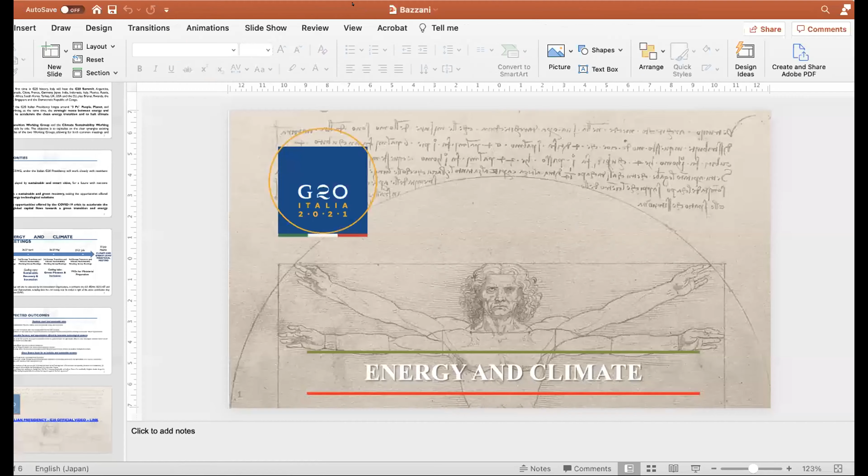As you can see in front of you, in my virtual background, the symbol of the Italian presidency this year is the Vitruvian Man, the famous drawing from Leonardo, representing man and its perfection within the space, within the planet we are living in. What better example of the nexus between energy and climate, for a more prosperous, livable reality, than this?

We intend to make, for the very first time, energy and climate a driver for development, a driver for sustainability, accelerating the clean energy transition and halting climate change. Next slide, please.

This is the decision why this year we have decided to have the energy transition and climate sustainability work hand in hand together towards the first ever joint energy and climate ministerial meeting. We have decided to elevate to the podium of the ministerial meeting the climate change issue together with energy, because energy is, as of today, responsible for around two-thirds of global GHG emissions.

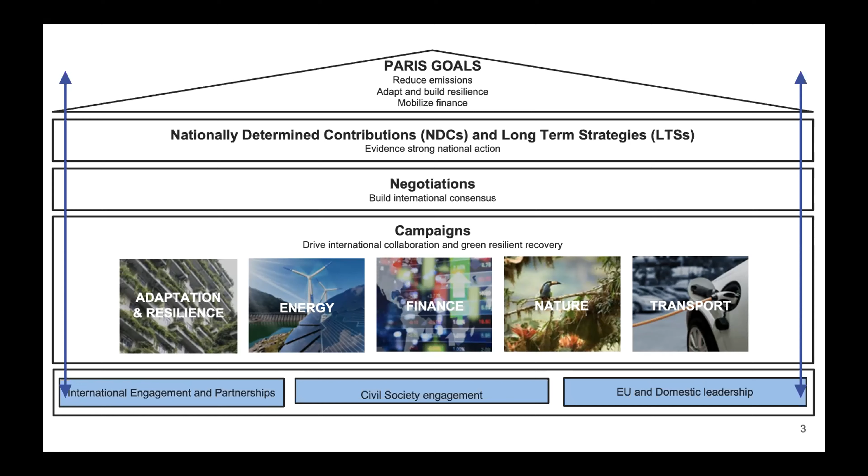Under the partnership agreement for the COP26 presidency, Italy will host a series of preparatory events. In particular, we will host in Milan the pre-COP, the preparatory meeting for ministers, traditionally held about a month before the COP, aimed at offering ministers representing the main negotiating parties an opportunity to informally discuss key political aspects of the upcoming conference. It's a relevant step for the negotiations to succeed.

We will also host in Milan, back to back, an event called Youth for Climate Driving Ambition, linked to the pre-COP, giving young people from all over the world the opportunity to draw up concrete proposals which will then be taken into account by the pre-COP and COP26.

We decided to join the two events because we believe it is crucial to promote the engagement of young generations and channel in a positive and constructive way the youth mobilizations we see all around.

We will also host in Rome in October a high-level ministerial outreach event on environmental and climate challenges in Africa. Our vision is that all these events should be an opportunity to broaden the theme of ambition to all actors involved in global climate action, including young people, civil society, the business world, academia, local authorities, and regional institutions. Thank you.

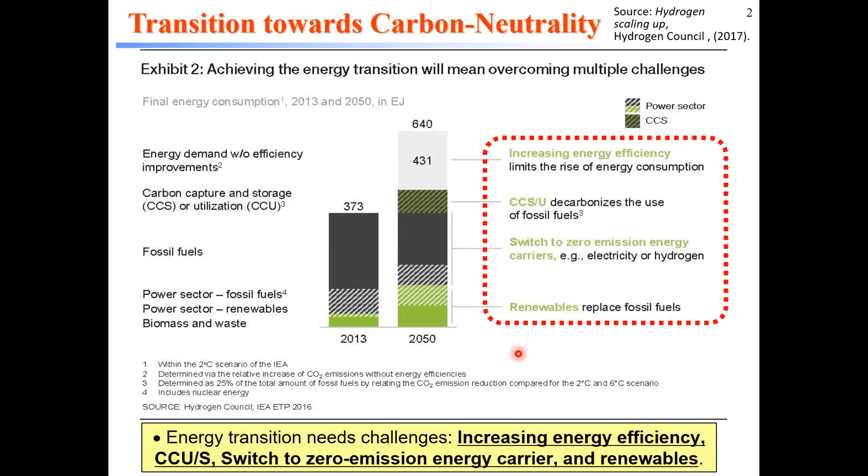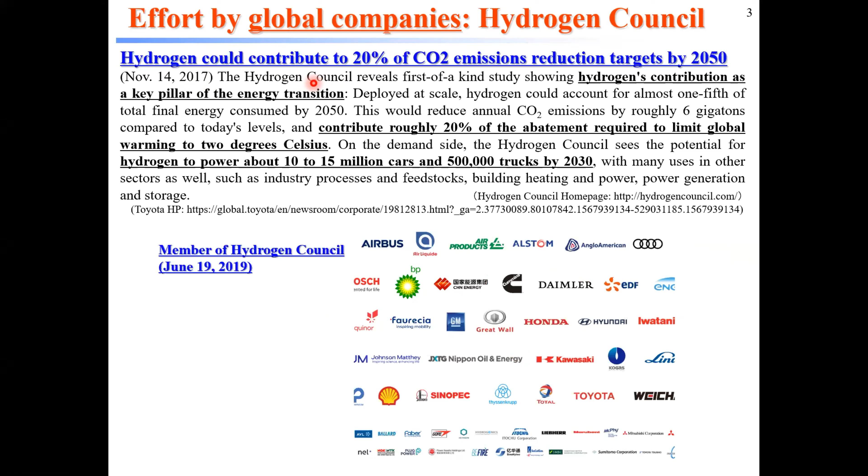Especially almost 5 years ago, many of you were excited about new fuel cell vehicles. For example, in Japan, Toyota released commercialized fuel cell vehicles by 2014. At that time, many of us had the feeling that hydrogen was something only for fuel cell vehicles, but I think since a few years the reason why hydrogen is important has gradually changed.

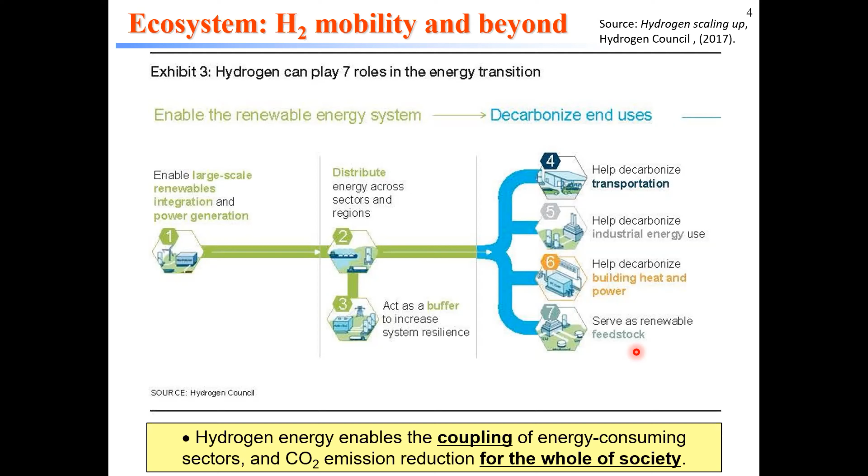Hydrogen can also act as a buffer against fluctuating renewable electricity. So such green hydrogen can be used for transportation, but also industry energy applications, building heat and power, and hydrogen can also be used as feedstock. These are the reasons why countries like those in Europe have an increasing interest in hydrogen energy technologies.

I would also like to mention the history of how the Japanese government has changed its energy policy regarding hydrogen. I think Japan was the first, or one of the first countries, to clearly establish a roadmap for hydrogen and fuel cell technologies.

This roadmap was issued in 2014, almost 7 years ago. I was also involved in the committee meeting to establish this roadmap. At that time, we had already developed a residential fuel cell. Toshiba's Matsuda-san also strongly contributed to the development of these technologies, and will give a presentation later in this webinar. We are very happy that the fuel cell vehicle was commercialized in 2015, and now we can buy commercial and industrial fuel cells for industrial applications.

Hydrogen price is still somehow expensive, but we have set a clear target to reduce it. From this fiscal year, a big national project has started to reduce the cost of fuel cell vehicles. Companies like Toyota and Honda are working hard, and we have nice collaboration with such automotive companies. In the middle of the 2020s, maybe 2025, we hope hydrogen price will be reduced down to, for example, 30 yen. Currently, 100 yen is the price. But if hydrogen prices go down to 30 yen, we can also expand the applicability of hydrogen technologies.

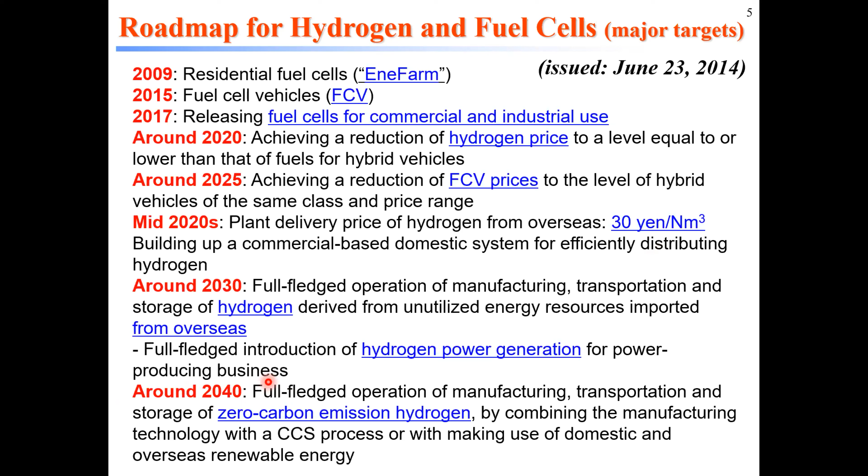Around 2030, hydrogen may also be imported from overseas, because Japan is a relatively small country, so we must import a huge amount of energy resources from overseas. We hope we can import green hydrogen rather than blue hydrogen. We are also developing technologies, for example ships for hydrogen transportation. By 2040, we want to introduce more green hydrogen, and that is also a great challenge for our country.

After 3 years, we have revised the scenario for the basic hydrogen strategy. This is a public national paper, and you can clearly see the numbers for such targets. It's important for private companies because when the government has a clear target, private companies can consider their strategy and make long-term investments to develop such technologies. For example, hydrogen volume is stated, and the cost of hydrogen is stated. Currently $10 per kilogram, but in the future $3 per kilogram, and eventually we will reduce the hydrogen price down to $2 per kilogram, with which we can realize or start power generation using hydrogen or hydrogen carriers like ammonia.

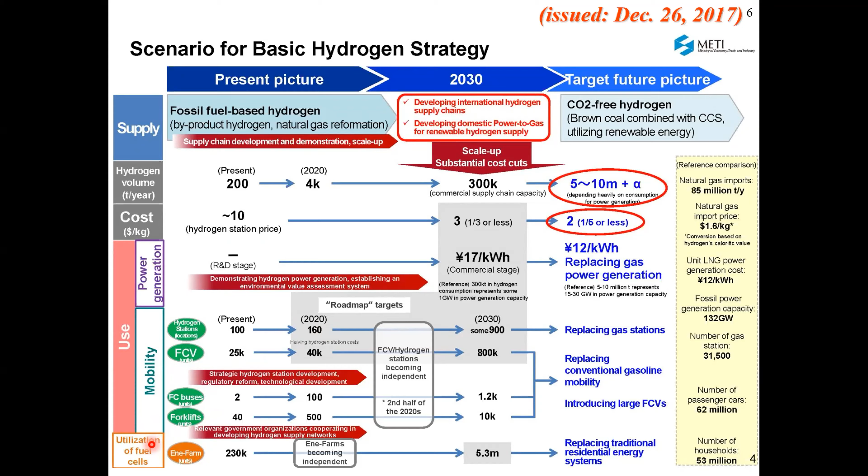Mobility is one of the important applications, and we can now buy fuel cell vehicles. Many countries have realized that FCV is a promising technology, not only for private vehicles but also commercial vehicles like buses, trucks and trains. We are moving in this direction, and several companies have started to develop such commercial vehicles. Especially in Japan, we need electricity and heat at houses, so residential fuel cells, like the Ene-Farm, have become a popular product. Solid oxide fuel cells and polymer electrolyte fuel cells can also contribute to these technologies.

It is clearly stated that we should reduce CO2 emissions from electricity and power generation, and reduce CO2 emissions related to fuels and feedstock. It is clearly stated that by 2050, electricity must be produced in a decarbonized manner. Maybe 50 to 60% should be renewables, and 30 to 40% should come from either nuclear or fossil fuels, but combined with CCUS - carbon capture, utilization or storage.

It is very nice for me because that was our first official government paper which clearly stated that hydrogen or hydrogen carriers like ammonia should produce 10% of the whole electricity in our country. That is the first such paper, and it is very surprising. But it is a very tough target because we should produce hydrogen in a much cheaper way, and mass production is important.

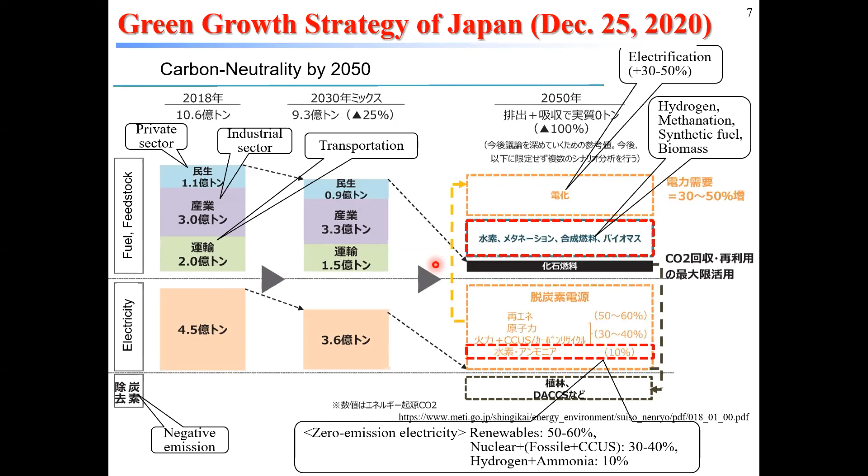That is official paper, and I think government officers will also use the English version in official meetings. For example, G20 is hosted by your country, and it is very nice for such continuous discussion.

So hydrogen is something important, becoming increasingly important, because until now we have electricity and heat widely used as a secondary energy carrier. But now we can introduce hydrogen as the third secondary energy carrier, but also a chemical hydrogen energy carrier. And that becomes possible because industry, in Japan and also around the world, has developed fuel cells and electrolyzers. And of course we have started to introduce hydrogen infrastructure like hydrogen refilling stations.

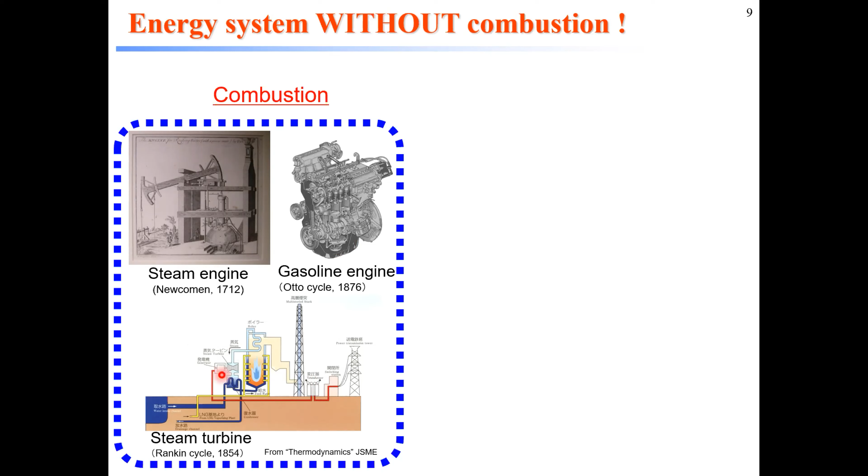So hydrogen is not something theoretical anymore, and we hope that Japan can also continuously contribute to that type of technologies. Hydrogen can also be used for combustion technologies, because now we are discussing, for example, mixing hydrogen gas with natural gas-based power plants, or ammonia may also be introduced in coal-based power plants. So such power plants may continue to be used, but gradually we can also realize the decarbonization of such power plants.

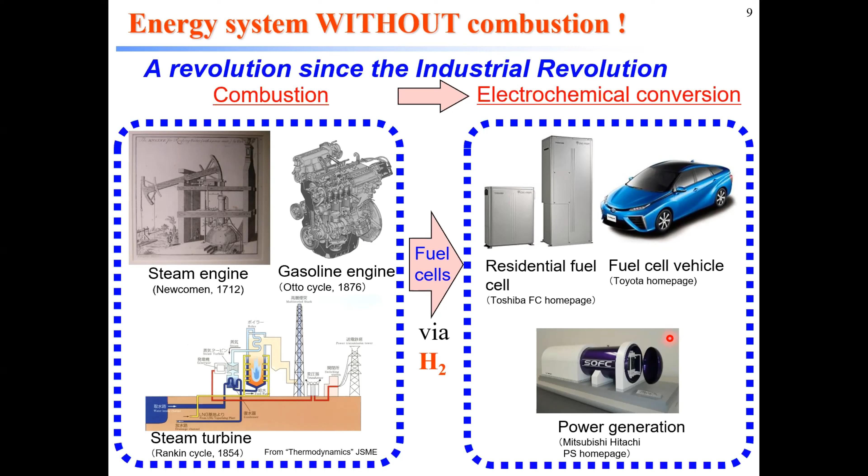But of course, as an electrochemist, and Enrico is also an electrochemist, we are very happy that fuel cell technologies will also continuously advance. Now in Japan we can also buy the residential fuel cell, we can buy fuel cell vehicles, and larger scale fuel cells become increasingly important. I think Solid Power is very active in Italy in this area, and I'm very happy to hear their presentation.

And of course transportation is one of the important applications of hydrogen. For example, Toyota has already announced the second generation Mirai, and actually Kyushu University had already ordered this Mirai by December. So if you come to Kyushu University, you can also enjoy driving the new Mirai, but also the first generation Mirai, and Honda Clarity. But after the COVID-19 pandemic, hopefully we can also meet that at our Ito campus.

In addition, I should also mention that an increasing number of companies have interest in realizing commercial vehicles with fuel cell technologies, and that is a very challenging area where, for example, countries like China, the United States, and also European countries have strong interest in such commercial vehicle development.

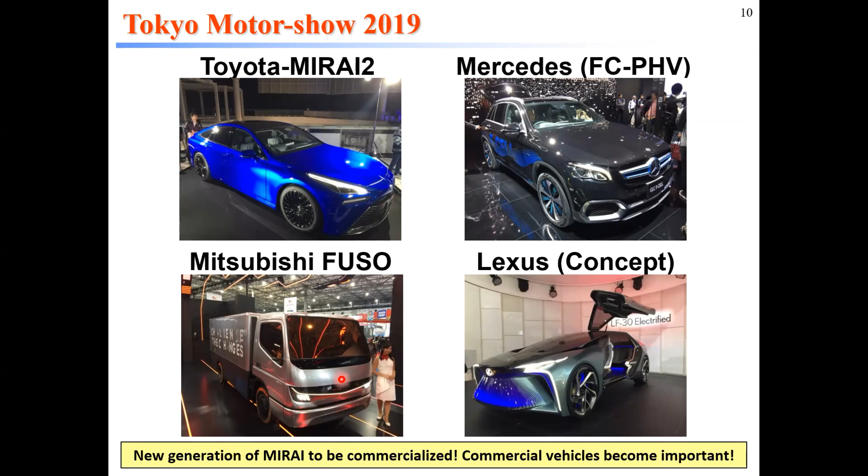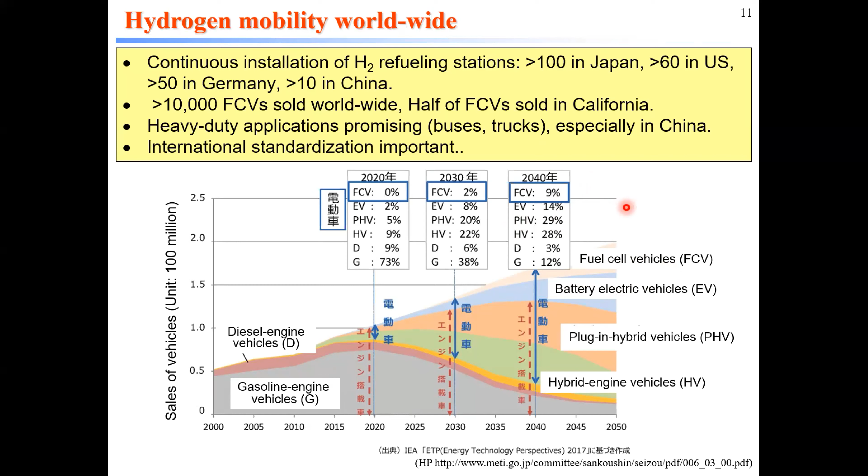Even though fuel cell vehicles need time, because we are also developing, for example, mass production technologies, it takes time, but with time we can also increase the fraction of fuel cell vehicles. For example, IEA expected that by 2040, FCV may be 9%. 9% is very small, but developing the mass production technologies is also a very, very tough, great challenge for fuel cell engineers and researchers.

I hope both types of fuel cells, polymer electrolyte fuel cell and solid oxide fuel cell, can also realize wide application of such electrochemical energy systems. For example, polymer electrolyte fuel cell is very nice for automobile application, but a company like Airbus has already announced an airplane using hydrogen. This is very interesting topic.

And also solid oxide fuel cell is a promising technology. We are saying that it's a hydrogen-ready technology, so hydrogen can also be used for the solid oxide fuel cell, but other fuels, for example renewable methane and biogas and so on, can also be used by solid oxide fuel cell. So SOFC is also included as hydrogen-ready technology, and using both types of fuel cell, we can also contribute to decarbonizing the technologies.

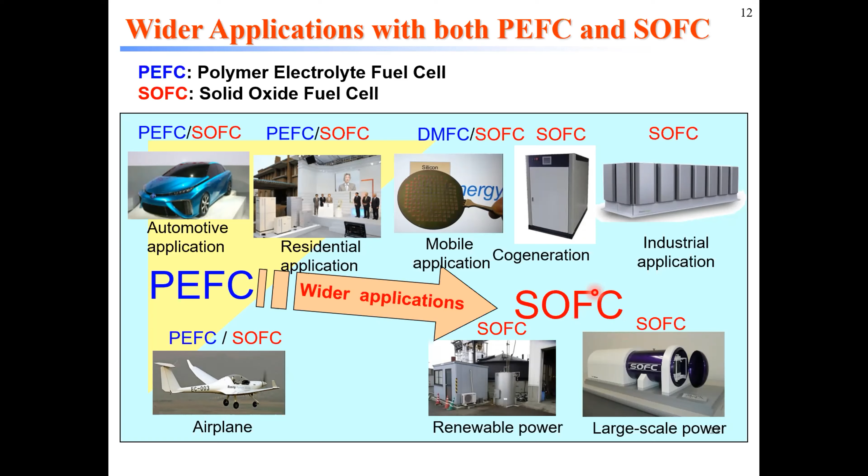We can buy the solid oxide fuel cell in our country for more than 10 years now. For example, current residential fuel cells can also generate with energy conversion efficiency beyond 50%, and the company guarantees no maintenance during 10 years. The reason is that we have understood the durability of the solid oxide fuel cell. Now the product is in the market.

Yeah, it is also very challenging to work in this area because larger scale application of fuel cell is interesting. For example, that is one of the first systems installed in our campus. I'm also standing here.

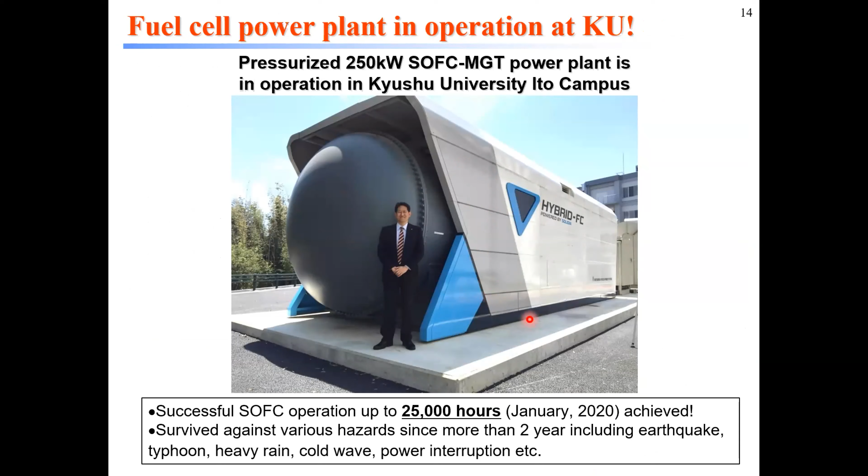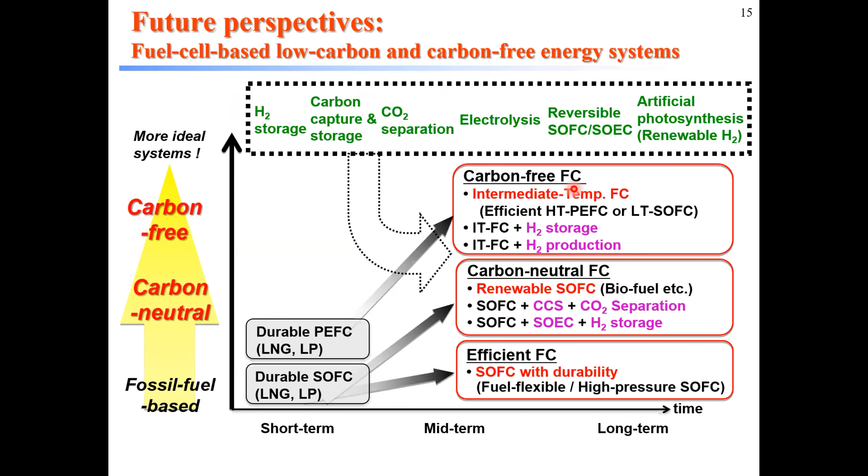I was always very happy, and we are also continuing such commercialization in our countries. I hope that other various technologies should be developed to combine with fuel cell technology to realize more efficient energy systems, a carbon neutral and carbon free energy system, which we will also develop in the future.

If you want to understand why Japan has such strong interest in fuel cell and hydrogen technologies, please read our book published five years ago. You can find there the Japanese secret of why we have such strong interest in these kinds of technologies.

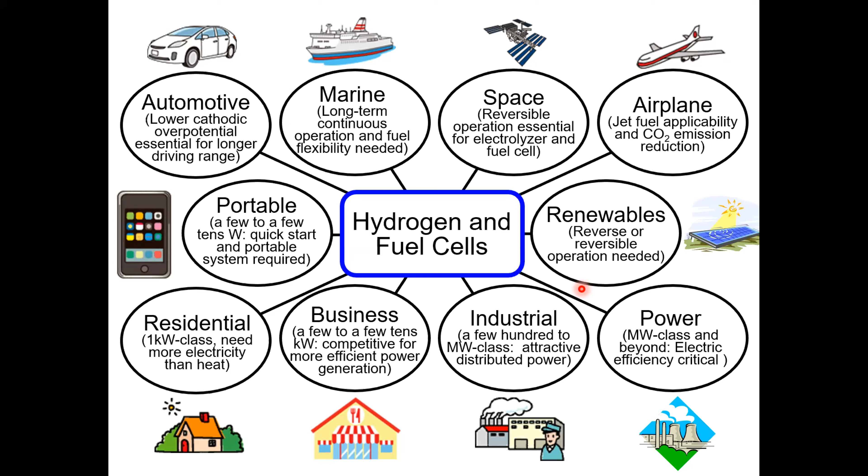Even though the application is still limited to automotive and residential uses, we are expanding the applicability of fuel cell technologies. For example, this fiscal year the government started a new project for fuel cells for marine application, and the government has also placed great importance on hydrogen for airplane application. I hope this ecosystem of hydrogen fuel cells will expand, where both countries can make certain collaborations.

So even though we are still using so-called gray hydrogen, because most hydrogen is still produced from fossil fuels, we are also developing fuel cell and hydrogen infrastructures. We hope to simultaneously make the transition from gray hydrogen to blue and especially green hydrogen, which may be the ultimate solution in the future. And that must be realized by 2050.

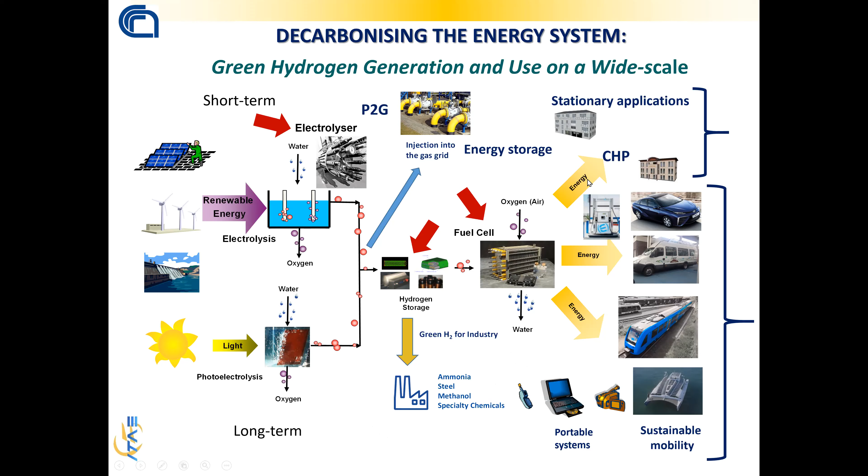Today, I will discuss more in detail some technical aspects of electrolysis technologies. We have a consolidated alkaline electrolysis technology, but in recent years polymer electrolyte membrane electrolyzers have become very important in this field because of their excellent dynamic behavior, which allows systems to operate in combination with intermittent renewable power sources. Using these systems, we can achieve extremely high current density, extremely high performance, high hydrogen purity, and operation at high pressure, because we need pressurized hydrogen to achieve high energy density.

However, there are significant drawbacks still to overcome in order to make the system economically competitive and to widely address the conversion of electricity into hydrogen.

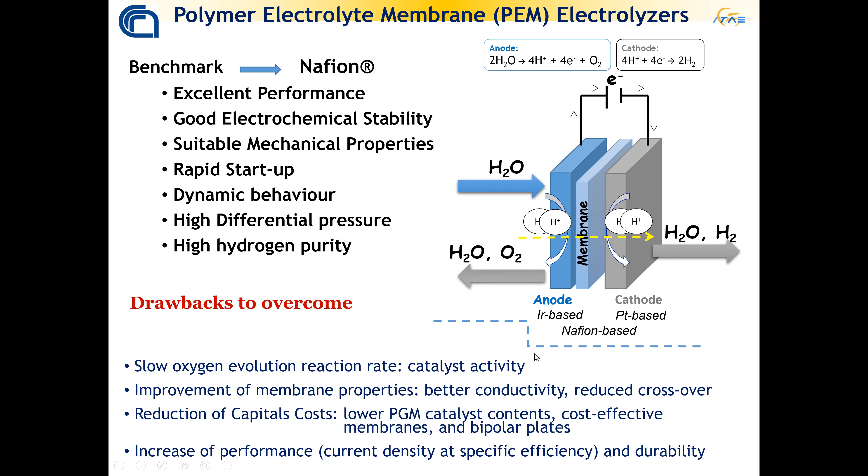We need to accelerate the oxygen evolution reaction by using enhanced electrocatalysts. We need to operate at a high current density to reduce capital costs, and we need to reduce the critical raw materials and improve membrane properties.

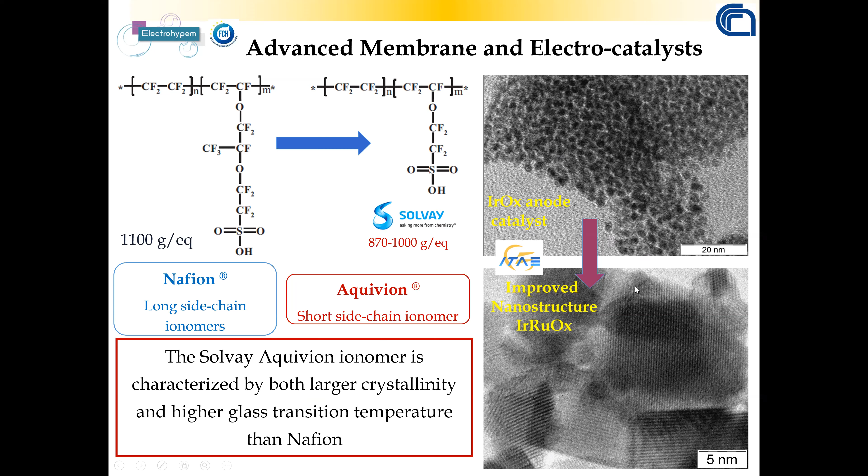In the FCHJU Electrohypem project, a European project I had the honor to coordinate, we introduced for the first time the Italian-produced Aquivion membrane produced by Solvay Specialty Polymers into the field of PEM electrolysis. This membrane has enhanced properties in terms of lower equivalent weight, wider operating range, and higher conductivity. We also introduced improved nanostructured electrocatalysts in place of conventional electrocatalysts to increase the performance of PEM electrolyzers.

The enhanced efficiency of this new membrane produced in Italy was assessed by our colleagues at ITM Power in the UK, in the framework of this European project, and reinforced membranes can allow operation at high differential pressure in the context of electrolysis.

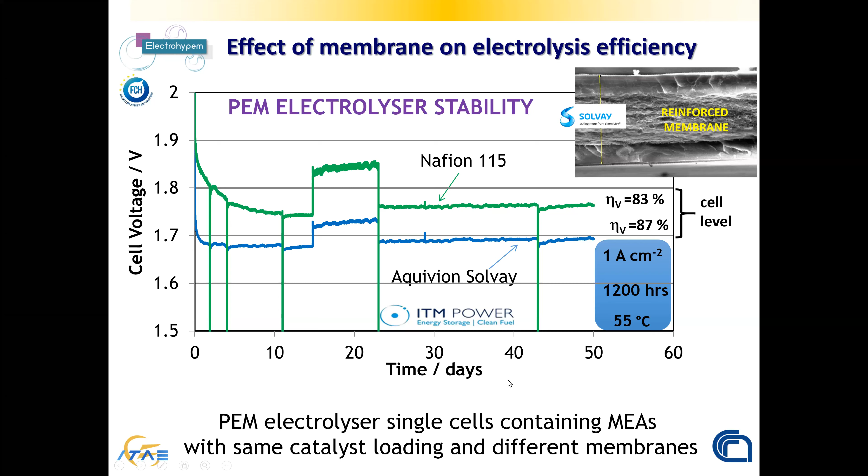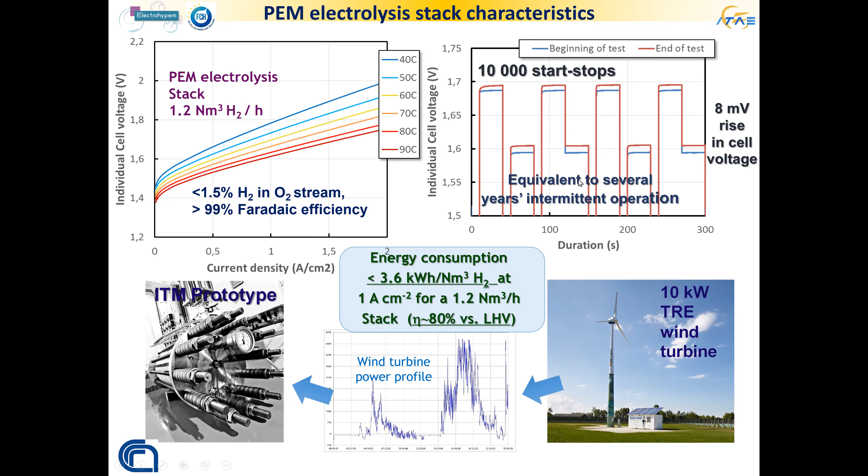In the framework of this European project, we have assessed interfacing a PEM electrolyzer with the intermittent power profile from renewable wind turbines produced by Tozzi Renewable Energy, and we have shown that this advanced technology can operate with excellent dynamic behavior, sustaining something like 10,000 starts and stops without relevant degradation and with excellent Faraday efficiency.

In the subsequent European project, HPEM2GAS, also coordinated by myself, we addressed the ambition to increase the operating current density from 1 to 3 amperes per square centimeter, while maintaining cutting-edge efficiency of 80%, with energy consumption lower than 50 kilowatt-hours per kilogram of hydrogen.

We introduced this new advanced electrocatalyst and membranes into MEAs produced by IRD in Denmark, and these were integrated into PEM electrolysis stacks produced by ITM Power.

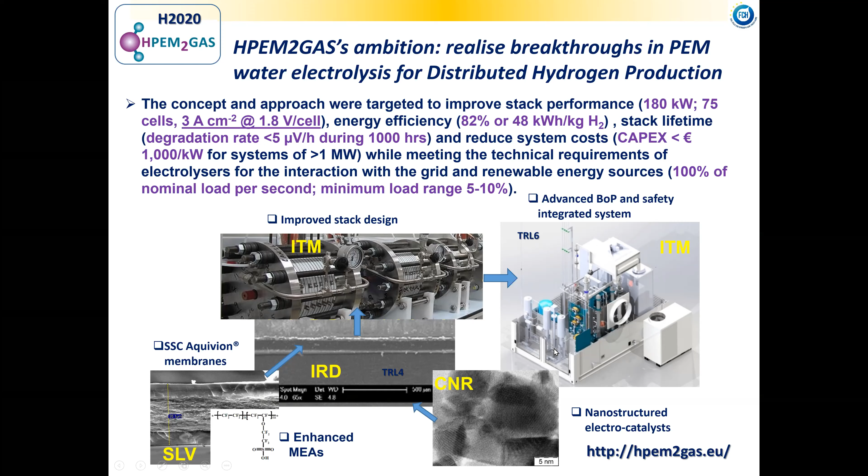We have demonstrated that this advanced stack technology, a 180 kilowatt stack, is based on an advanced design. You can clearly see in this case there are no tie rods - this is using a new hydraulic compression technology.

Using this approach in the framework of the HPEM2GAS project, we achieved 80% efficiency at 3 amperes per square centimeter. This stack has been integrated into an electrolysis system, and this was demonstrated in Emden, Germany.

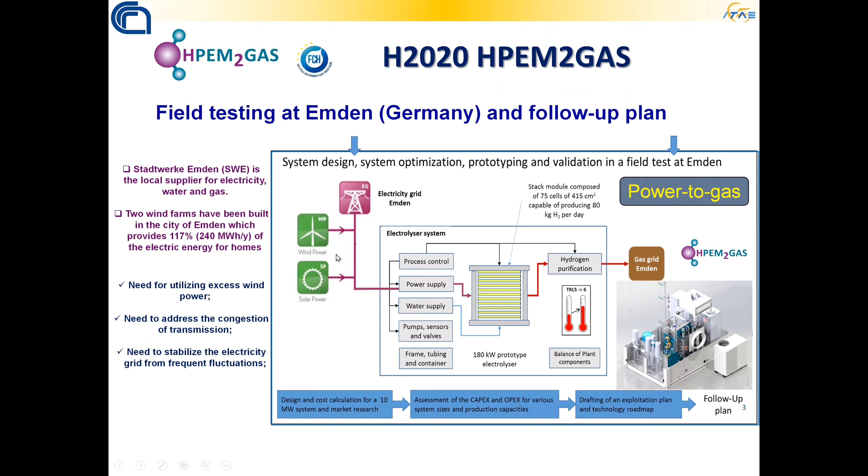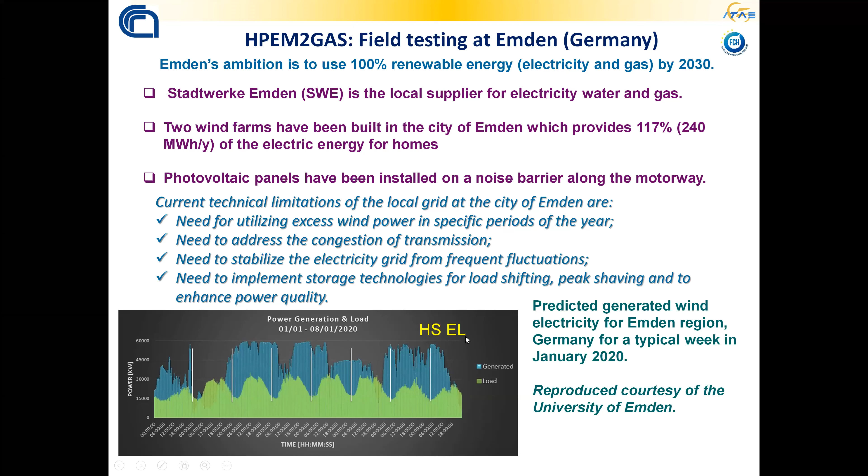This means that in order to avoid this surplus of energy being lost because it cannot be accepted by the grid, it should be converted into chemical energy. We installed, as a proof of concept in Emden, in the framework of this EU project, an advanced PEM electrolysis system, 180 kilowatt, connected to a gas uptake station in order to inject the hydrogen directly into the natural gas grid.

In this field testing activity using this advanced PEM electrolysis stack technology, we showed excellent performance in terms of low energy consumption per kilogram of hydrogen produced, about 50 kilowatt-hours per kilogram of hydrogen, especially at high current density.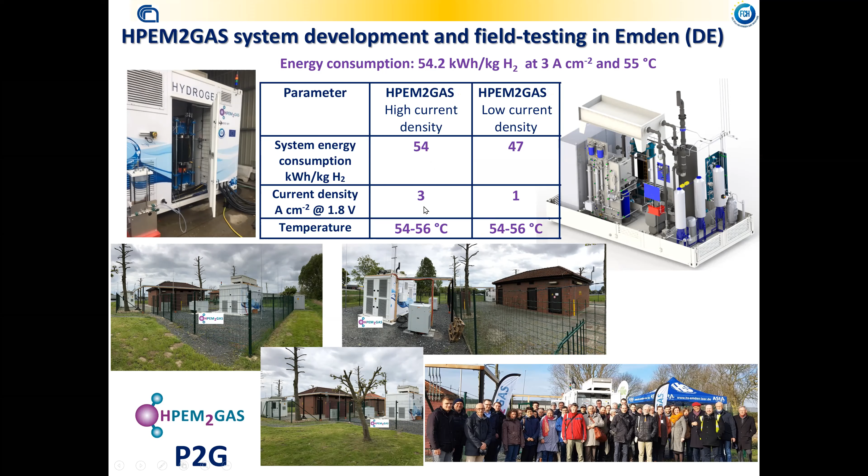Now, the new frontier in this field is regarding anion exchange membrane electrolyzers. This is still a PEM electrolysis technology using a membrane separator operating at high pressure in order to reduce energy consumption in the post-compression process.

But this new membrane is based on an anion exchange process. That means the protonic membrane is replaced with an alkaline membrane, and we can replace all precious metals with non-precious, non-critical raw materials, and replace titanium bipolar plates with cheap stainless steel. Using this technology, we think we can reduce the capex of electrolysis technology from more than 1,000 euros per kilowatt to about 500 euros per kilowatt.

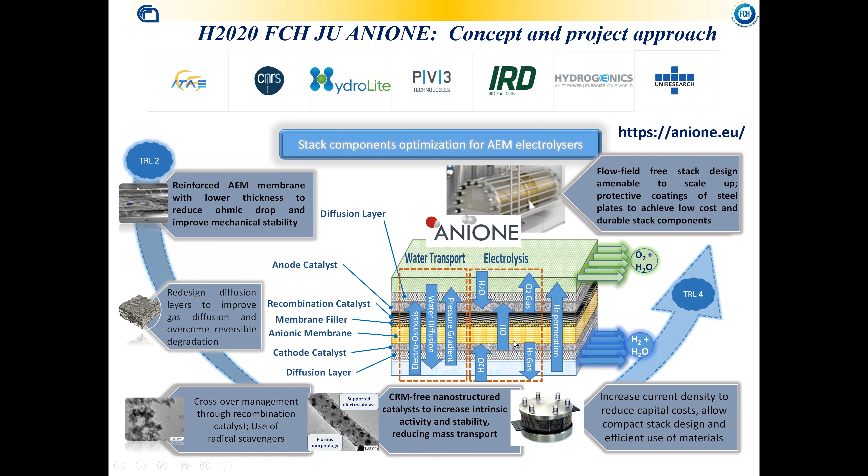Now I will briefly discuss end uses of green hydrogen. Our institute is strongly involved in developing PEM fuel cell stacks for automotive and stationary generation using green hydrogen. This is the evolution of PEM fuel cell stacks in our institute, based on advanced platinum alloy electrocatalysts and new membranes.

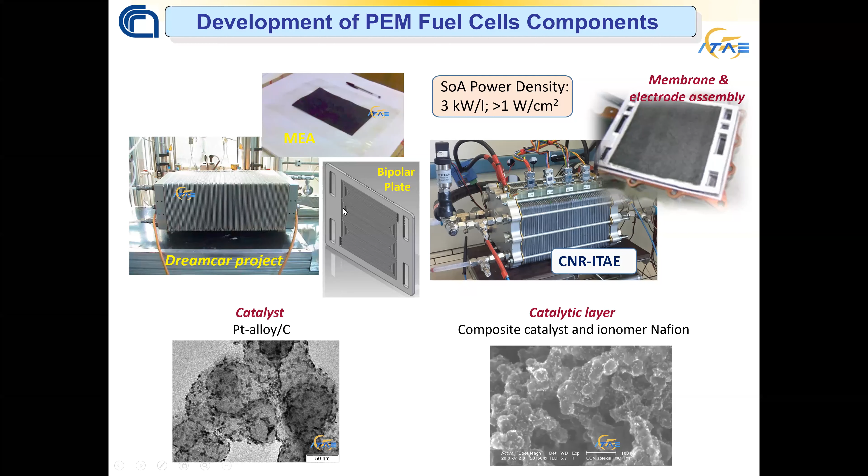Our collaboration with Solvay has shown the capability to operate these PEM fuel cell stacks at high temperature, covering a wide range of temperature. We have filed a patent together with Solvay on using radical scavengers in order to improve membrane stability over time.

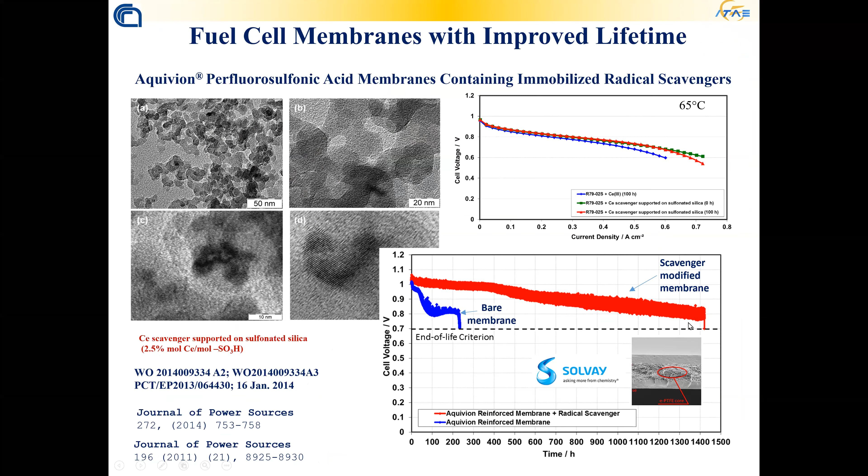Just a few slides about demonstration projects carried out by our institute. I'm referring especially to some regional projects.

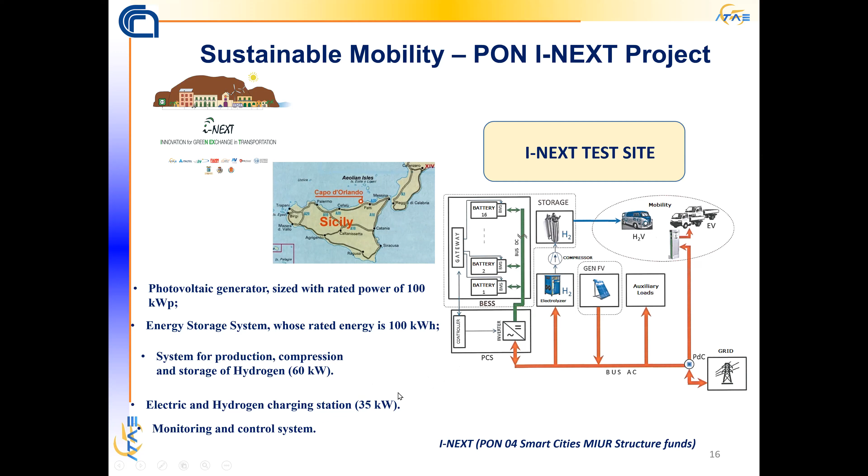The I-NEXT project we developed in a small municipality in Sicily, in Capo d'Orlando, a hydrogen valley based on a photovoltaic plant, electrolyzer, and refueling station. We produced green hydrogen to refuel small city buses currently used for recreation activities, and especially focused on the hybridization concept, hybridizing fuel cell systems with battery systems.

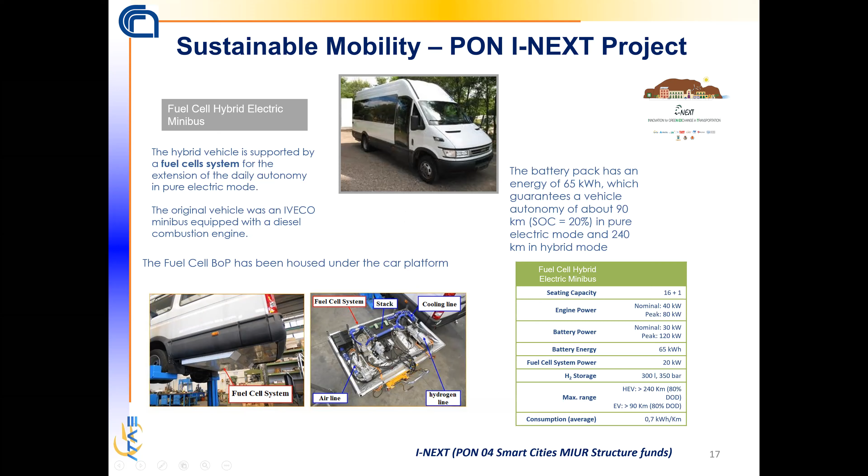Inside the balance of plant of this automotive system, these city buses have been developed in the framework of these regional projects, as examples of urban and suburban bus testing. Our activity at CNR ITAE Institute also covers the naval sector.

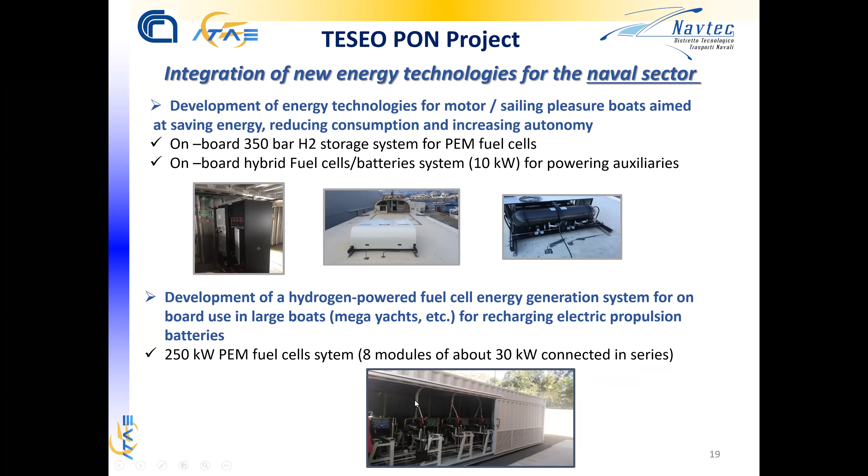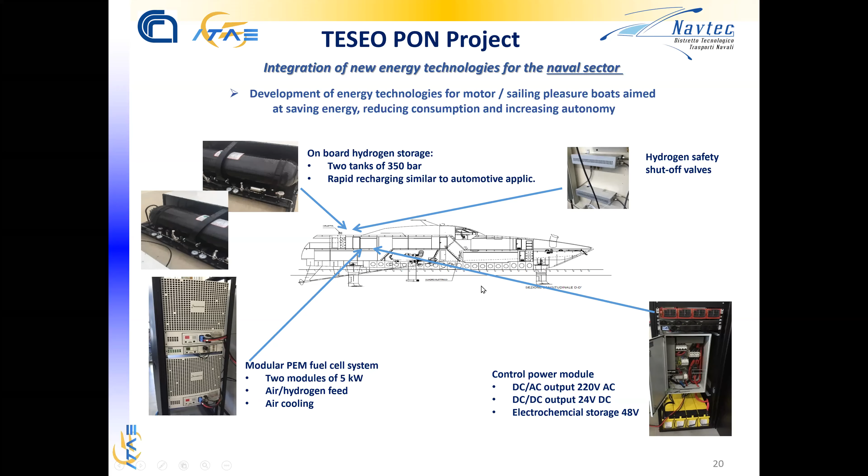We worked in the framework of the TESEO project on integrating hydrogen technologies on board small yachts and boats. We tested the hydrogen container on board and the fuel cell system. This slide shows how these technologies can be integrated: the hydrogen container, the fuel cell system, and the battery system into small yachts for naval applications.

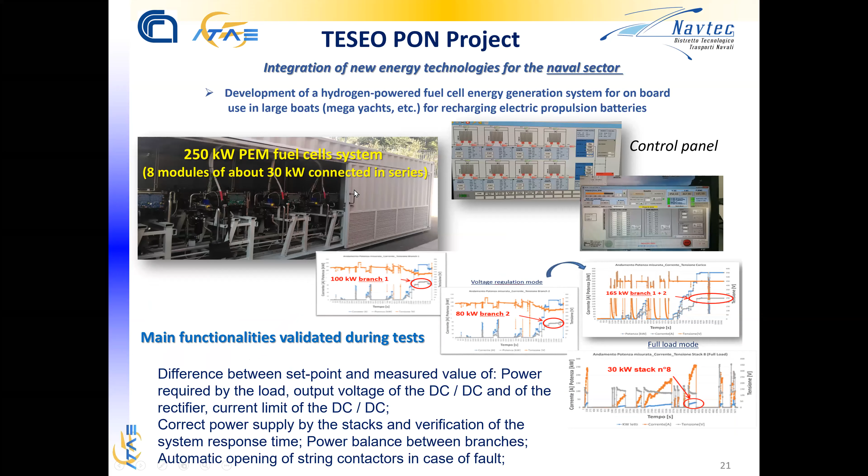This is a 250 kilowatt PEM fuel cell system to be used in naval applications. Very recently, we started a cooperation with Fincantieri to assess hydrogen technologies on board of boats used as a hydrogen laboratory, to test these advanced technologies.

This boat, called Zeus, tested in the framework of the TecBia project funded by the Italian Ministry of Economic Development, consists of a fuel cell system of 120 kilowatts on board with a hydrogen tank of 50 kilograms, allowing several hours, about 6 hours of navigation under complete autonomy at zero emissions.

With this, I have concluded my presentation, trying to provide insights about the projects we have carried out in this field in the framework of hydrogen. Of course, this is a great opportunity for us to have some cooperation with Japanese institutions. We already cooperate with AIST. I have already signed a cooperation agreement with AIST to work on polymer electrolyte membranes for fuel cell applications, and we are strongly open to cooperation with Japanese institutions. Thank you very much for your kind attention.

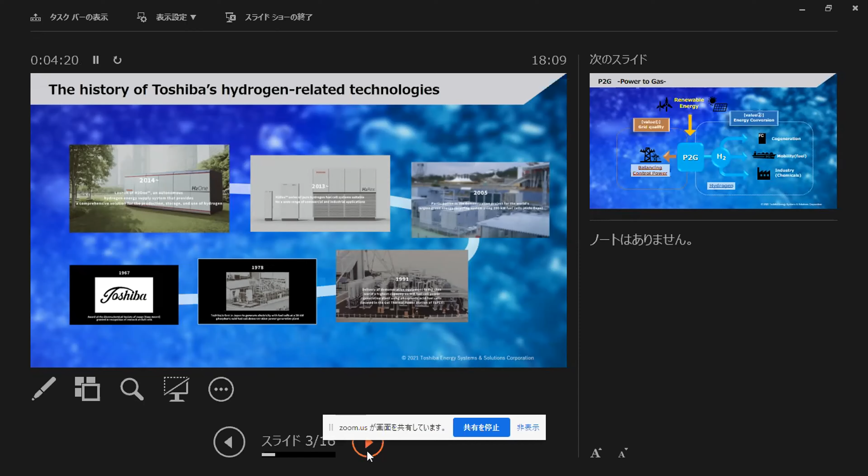This picture shows one example image of Toshiba's fuel cell business. Our most interested area is green hydrogen. Using power-to-gas technology, green hydrogen can be made.

We need to increase renewable energy. However, renewable energy is very fluctuated, not stable, so to keep good grid balance and grid quality, some adjustment system is required. Toshiba is considering green hydrogen from renewable energy and also demand response from the grid side to make hydrogen. It's a very good solution for power companies and hydrogen supply chains.

The stocked hydrogen is delivered to a variety of places, and at each site hydrogen is used to make electricity. For example, CHP cogeneration, mobility use, or large size industry uses. For stationary fuel cells, we are supplying a 100 kilowatt type package hydrogen fuel cell unit, and we are also ready to supply few megawatt class hydrogen fuel cell systems.

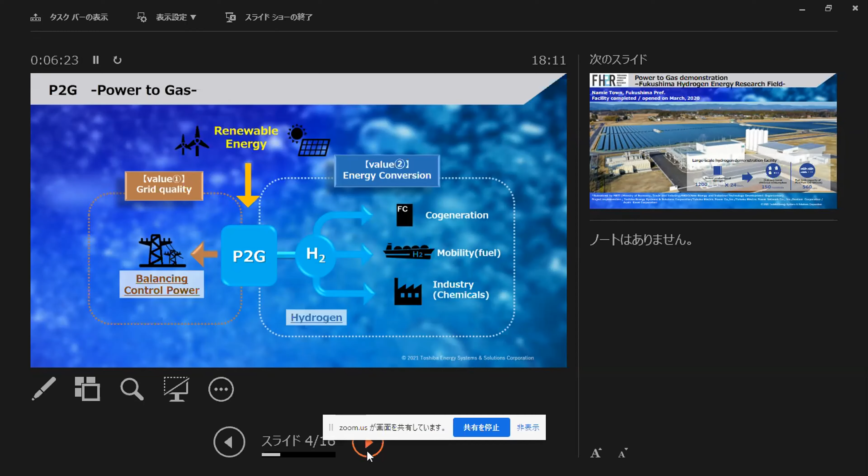Today's topic, I would like to explain, is that we started the fuel cell module for heavy duty mobility vehicles.

This is the demonstrational plant, Fukushima Hydrogen Energy Research Field. This is a large-scale demonstration facility funded by government, producing hydrogen using solar panels and also surplus energy from the grid side. This facility can produce 1,200 normal cubic meters per hour.

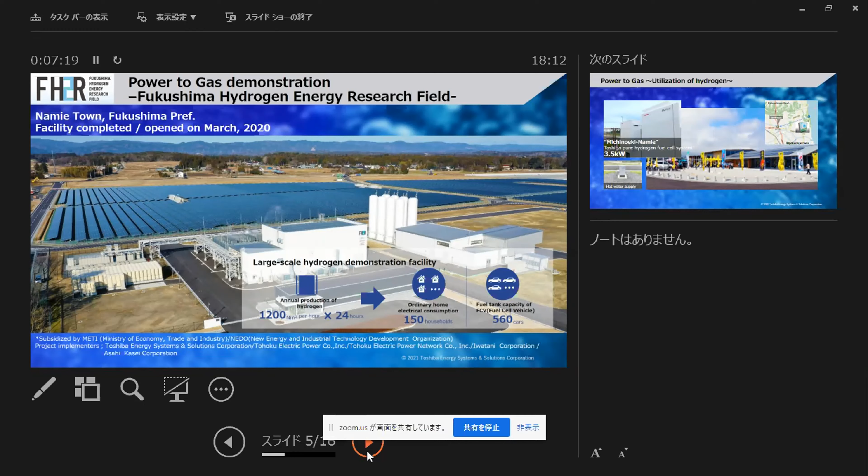This hydrogen is supplied to several areas in Fukushima Prefecture, Japan, for example soccer fields, gymnasiums, or shopping centers like this. Also, in the coming Tokyo Olympic Games, this hydrogen is transported to the Tokyo area and shall be used as fuel for fuel cell buses to transport athletes. I hope it will happen.

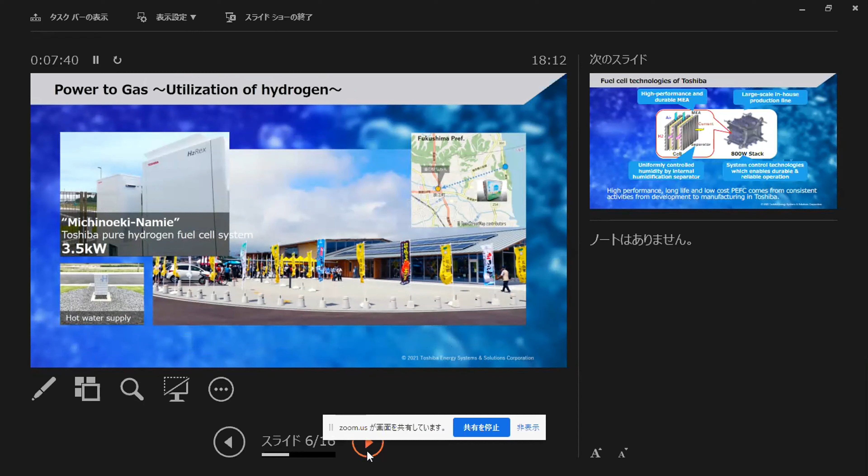This is our key technology. We are developing and making everything from material basis to power generating system. We have MEA manufacturing facility in-house and also cell stack assembling line in-house. We have a long history of system development and operation, and this enables us to achieve reliable long life systems.

This is our distinctive technology. We are using internal humidification systems for PEM fuel cells. The PEM membrane has to be wet, so anode gas or cathode air has to be humidified. For this function, we use a porous separator or bipolar plate. Each separator has a cooling water flow path, and this water can go into the porous separator plate to make a gas seal, and from the surface of the separator plate the humidification is supplied.

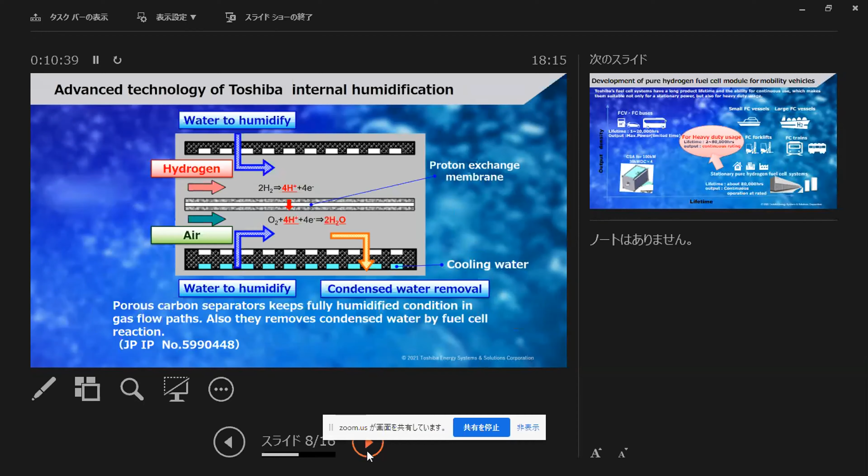This enables long life and also very low pressure drop characteristics. I have to mention the demerit of this system though - to make the porous separator, it becomes relatively thick compared to other fuel cell suppliers. It's our next developing target to make a thinner porous separator.

This picture shows the difference between fuel cells for vehicles and fuel cells for stationary uses. Stationary fuel cell systems need very long lifetime, continuous operation at rated power - at least 10 years continuous operation, meaning at least 80,000 hours continuous operation at rated power. On the other hand, for vehicle fuel cells, compact size and higher output is required, but it only requires a lifetime of maybe about 10,000 to 20,000 hours.

It's very different. Based on this, our stationary fuel cell technology - Toshiba thought for heavy-duty mobility applications, this technology may be suitable. On the other hand, the fuel cell vehicle side is trying to extend their lifetime. Anyway, good competition is very good for technology advancement, I believe.

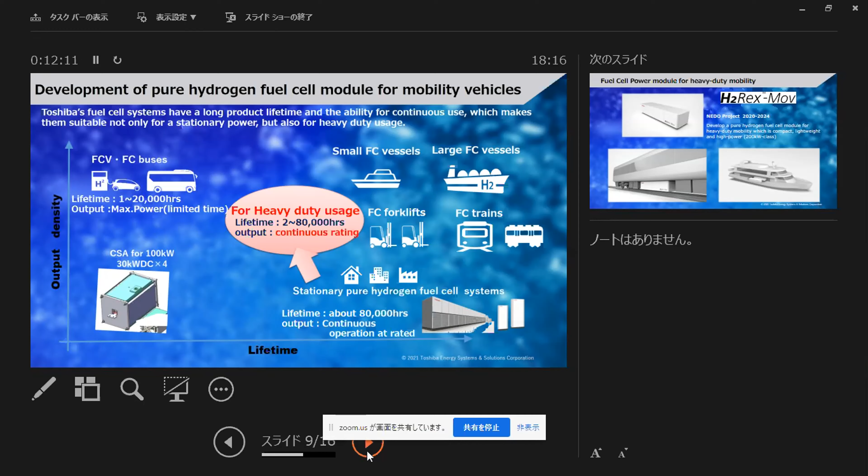So for the first product, we started development activity funded by government subsidy. We decided to develop 200 kilowatt class fuel cell modules.

for heavy duty mobility vehicles like maritime application or railway application. Why we decided 200 is, we had many people assess how much power is needed for such applications. So from the result, about 200 kilowatt per car of one train is proper. So we decided one unit shall be 200 kilowatt.

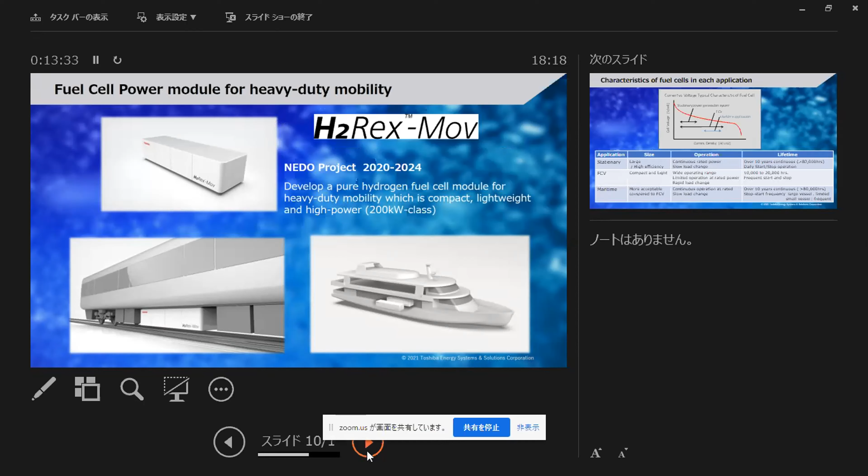However, for maritime usage, maybe a few hundred to a few megawatt is required. So we are going to design for multiple parallel operation availability. This is also the difference of operating range.

This graph shows the current density horizontal and the cell voltage vertical. Red line is general fuel cell output characteristics. The current of the fuel cell stack is linear to hydrogen consumption because of the theory of electrochemical reaction. So to have good efficiency, higher voltage is required. We are trying to improve this red line upward.

And for compact size, current density is extended to the right side. This is a development activity.

For stationary usage, we need higher efficiency because the merit is higher efficiency than grid power supply. So the operating area is relatively on the left side.

For fuel cell vehicles, maximum power, idle, or cruising power covers a very wide current density range. However, the maximum power time is somehow limited. Generally, they operate at about 30% of rated power.

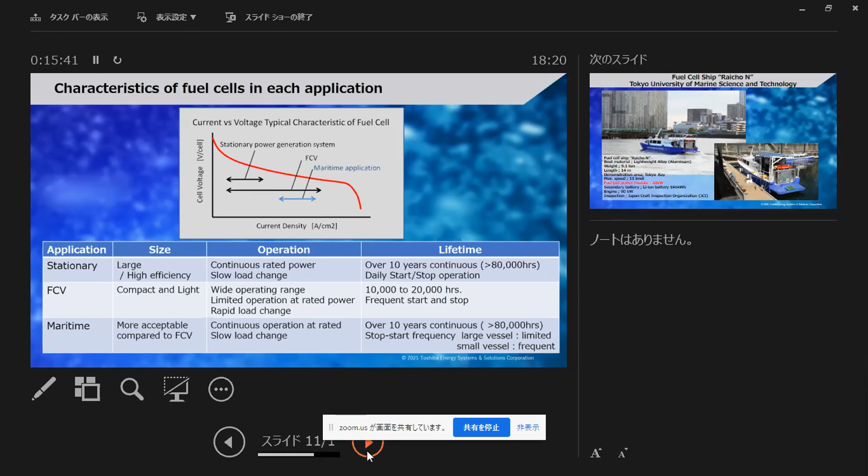For maritime usage application, continuous operation is required, and also compactness is required. However, we believe its space is larger than lightweight vehicles. This is the difference. For such application, this is our experience.

This is the 14-meter small ship operated in Tokyo Bay by Tokyo University of Marine Science and Technology.

We started cooperative development with this university from 2016. At first, we tried to install a residential unit itself, with no change to it. We installed 2 units of 3.5 kilowatt power output over 2 years. After operating for 2 years, we disassembled and checked, and found no degradation or problems. So we decided to start developing fuel cells for ships.

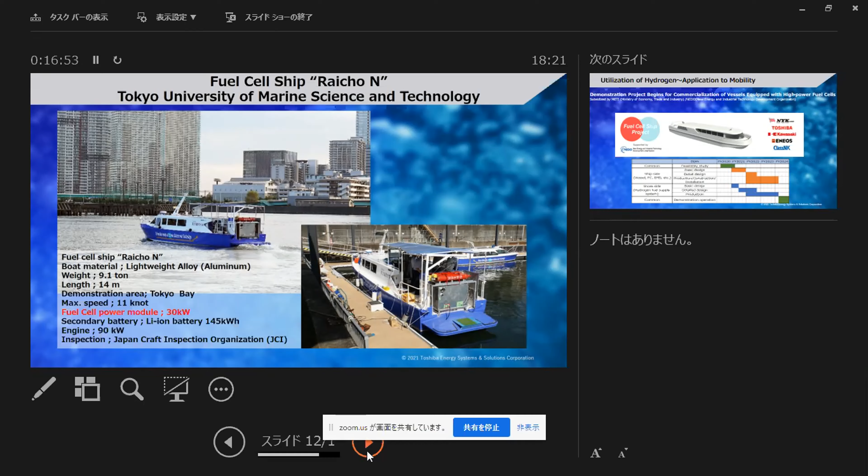Today, this ship has a 30 kilowatt unit on board and is operating in Tokyo Bay. This is a major topic of our activity.

This is also a government-funded activity. We made a consortium: the ship owner NYK Group, Toshiba as fuel cell supplier, and Kawasaki Heavy Industries, who is supplying the hydrogen storage unit on board, the hydrogen supply system, and also the energy management system. And ENEOS, the largest oil and energy supplier in Japan, is taking the lead for the hydrogen supply system on the ground side. And Class NK, the certification body, is contributing to safety testing and establishing the procedure to certify the ships. We are going to start the ship operation in 2024.

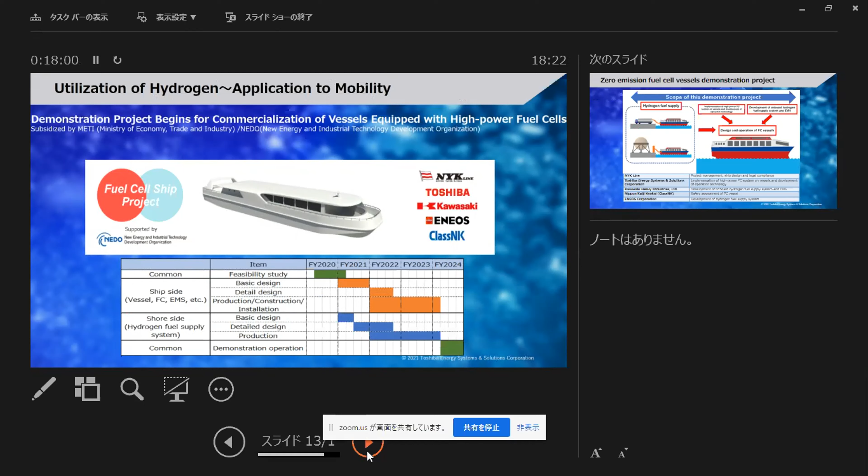And this is the demonstration program. I will show you an animation explaining this activity. Just a moment, please.

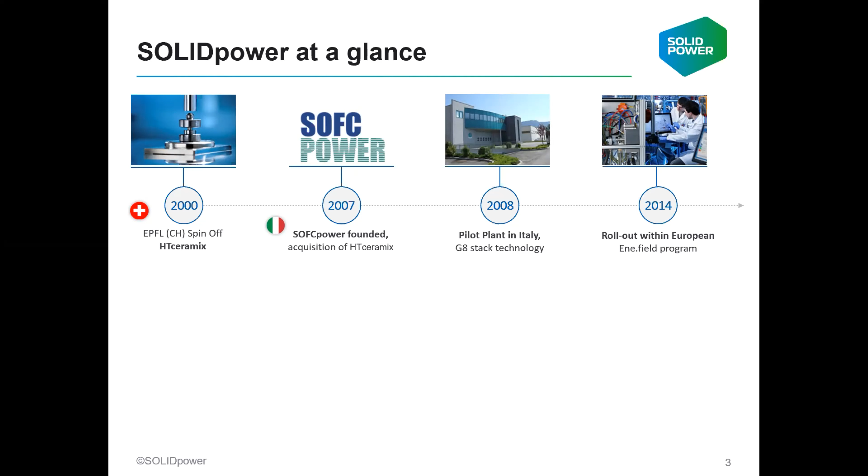In 2015, we acquired the facility of a former competitor, Ceramic Fuel Cell Germany, that was actually starting from an Australian company, a historical company in the field of solid oxide fuel cells. We restarted the commercialization of the BlueGen cogenerator in 2016.

In these years, we combined the experience of SOFC Power and the team of CFCL, the former team of CFCL, to further develop the system and start the commercialization of the current unit, which is what we call the BG15, BlueGen 15, our current product.

Last update is 2020, when we started the new industrial manufacturing plant here in Italy. I will show you some details later in the presentation.

Solid Power is distributed in 4 countries, headquartered in Italy, where we have the historical site in Mezzolombardo and the large-scale production facility in Pergine, in the Trentino area. We have a manufacturing plant in Germany, a prototyping and R&D facility in Switzerland, and another R&D facility in Australia, in Melbourne.

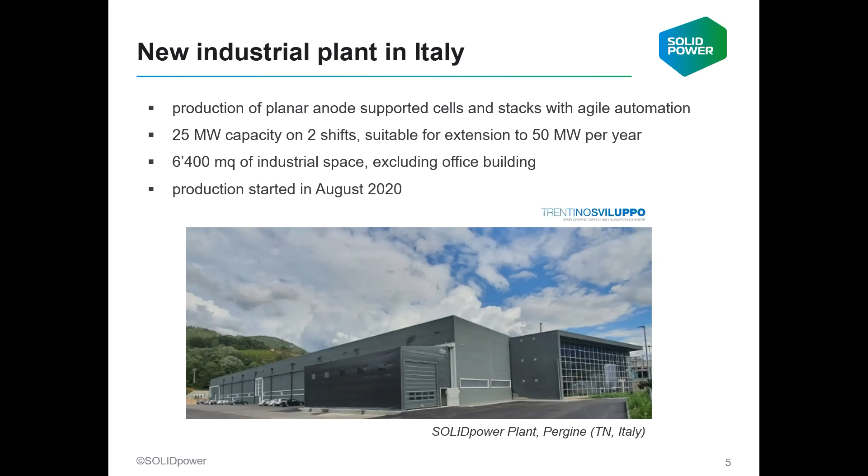This is a fully automated plant, with a productivity today of more than 1 million pieces per year. This is 6,400 square meters of industrial space, excluding the office buildings. We started production last year, in 2020, in August, so it is fully operating now.

In this plant, we produce what we call the G8 stack, which is the core of our system. This is the product ready for the market, installed on the BG15. It is a 1.7 kilowatt DC in fuel cell mode, consisting of 70 repeating elements with an active area of 80 square centimeters. The technology is based on solid oxide, anode-supported solid oxide fuel cells made with conventional materials: nickel oxide, zirconia cermet, and perovskite-based oxygen electrodes.

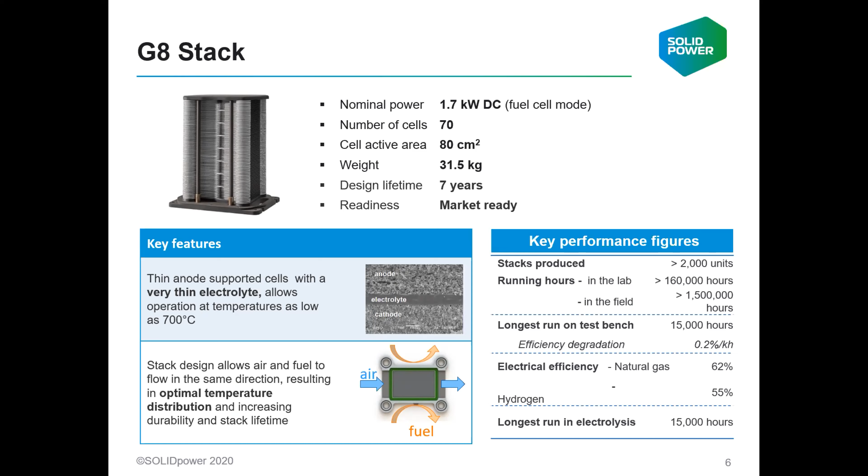On the prototyping level, we are working on a large-scale stack, mainly for industrial application. This is an 8 kilowatt DC stack and consists of an interconnect containing 4 cells. This scale-up approach helps us use the existing automated manufacturing facilities, and to use the same cells, sealing, and contact solution for both kinds of stacks, the small one and the big one.

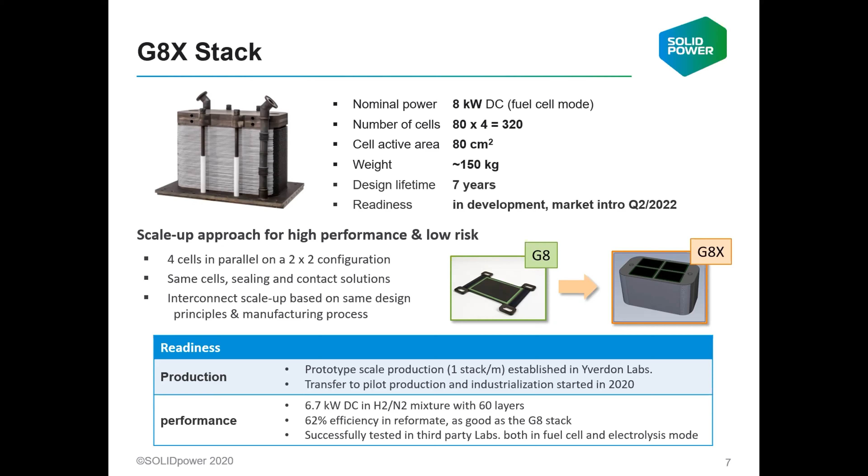The production of this stack today was made on a prototyping level in Switzerland, in our lab in Yverdon. Starting from this year, we are transferring the pilot production to Italy, in Mezzolombardo.

Our current products are mainly designed for solid oxide fuel cell operation. Potentially, we can use several kinds of fuels, starting from natural gas, which is widely available especially for domestic and residential applications. But potentially we can also work with liquid fuels, biofuels, hydrogen, and ammonia. Especially at the research level, we are also investigating this kind of operation, and we are working on prototypes.

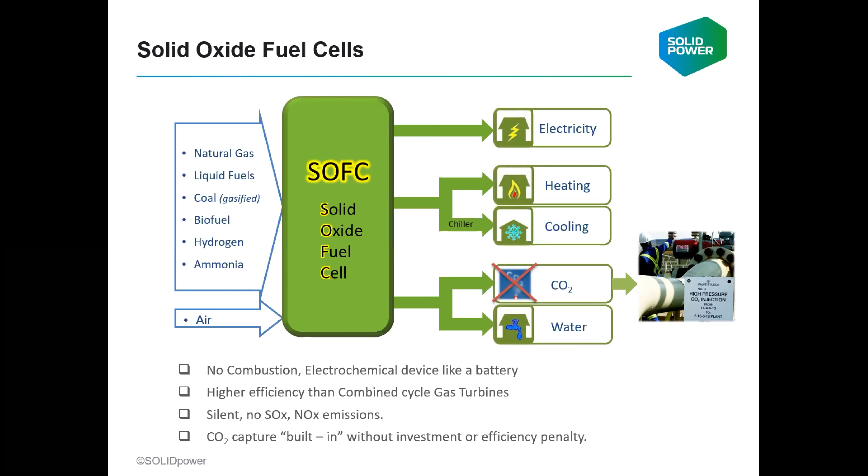Our product portfolio consists of 2 main units. The BG15 is a 1.5 kilowatt unit for residential and small commercial application, equipped with the G8 stack. The BG60 is the bigger unit, 6 kilowatt, for small commercial, hotels and restaurants, and some other industrial applications, equipped with the G8X stack, the large area design.

So basically we have two kinds of stacks for two kinds of products today. The applications are quite wide and include distributed generation and cogeneration, on-site hydrogen production, syngas production, and auxiliary power units for marine applications.

With the large area stacks, we are moving to a new prototype, which is the large stack module. This is a 20 kilowatt stack module in fuel cell mode, working up to 75 kilowatt in electrolysis mode. Today, we are working to expand the power up to 100 kilowatt in electrolysis mode.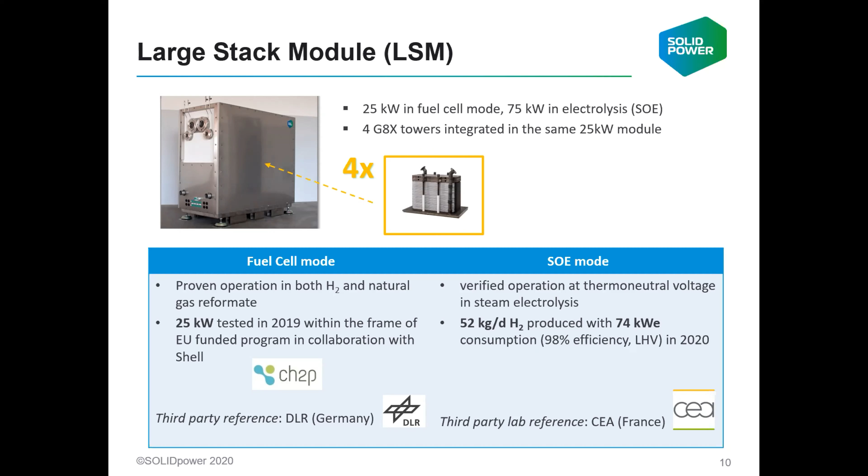Our market today is mainly concentrated in Europe, but we are also expanding to the US and East. Today, we have installed more than 1,900 units in 12 countries, and we have demonstrated stack lifetime up to 7 years and totally above 37 million hours of operation.

Other applications consist of high temperature electrolysis. In this case, we can use electricity mainly from renewable sources and water to produce hydrogen, working in steam electrolysis mode, or synthetic fuels and hydrocarbons, working in co-electrolysis mode.

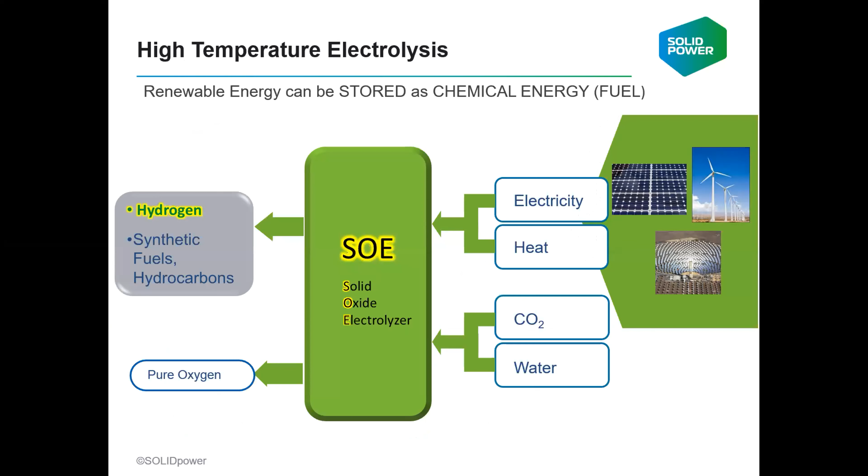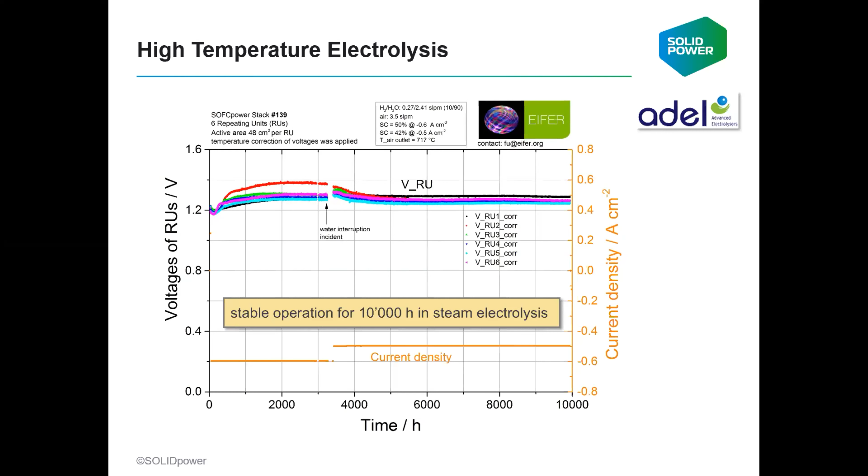We have investigated this operation mainly in the frame of European projects, and our experience on electrolysis starts 10 years ago in the frame of the ADEL project, where we tested for the first time one of our stacks in electrolysis mode for a durability test up to 10,000 hours with a very stable behavior.

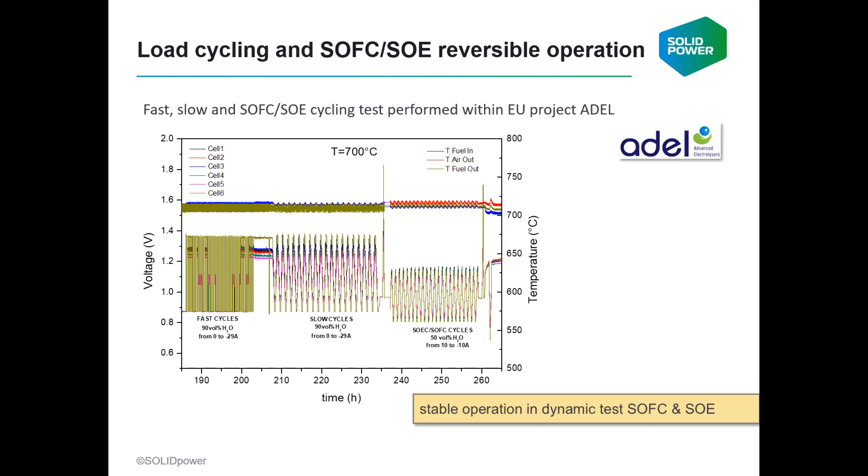With the aim of combining the electrolyzer with renewable sources, we have investigated the load cycling typical from solar and wind sources. We tested this operation for the first time at lower temperature in the frame of the ADEL project, but it was also investigated in recent years in the frame of SOPHIA and ECO.

In particular, in SOPHIA, we investigated load cycles in steam electrolysis and CO2-water co-electrolysis mode. We observed a slight decrease of performance due to cycling, but up to 11,000 cycles, the decrease was just about 60 millivolts for a total of 5,200 hours, roughly corresponding to 30 years of operation with one cycle per day, which is more than necessary for this kind of application. So the stability of the system, even with load cycling in electrolysis and co-electrolysis mode, is very, very good.

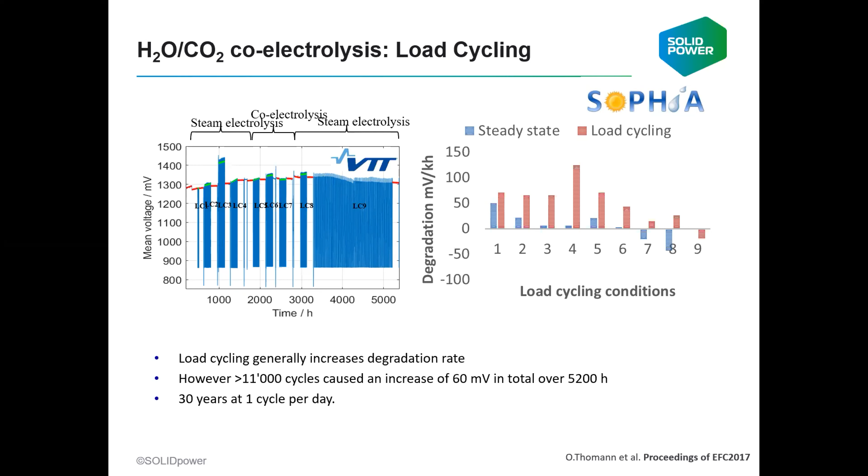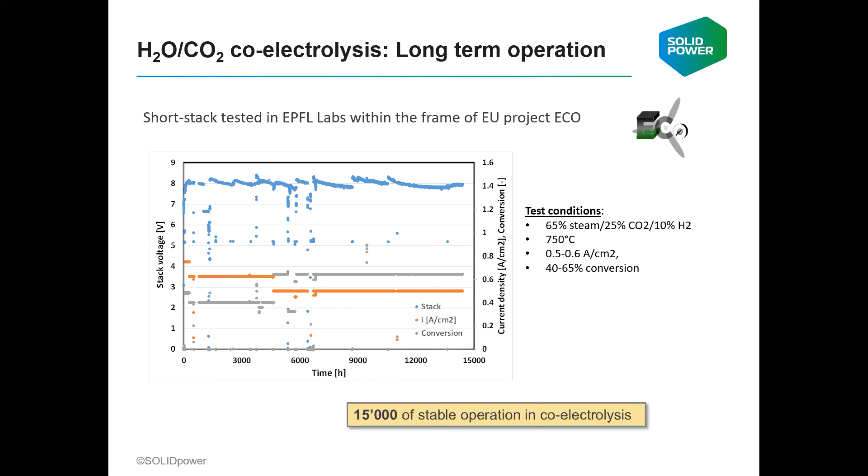We have also tested durability in co-electrolysis mode in the frame of the ECO project, and we have reached 15,000 hours of stable operation.

Finally, we are moving to larger area stacks, to our module with the 75 kilowatt electrolyzer tested in CEA. We made a map monitoring the performance of the unit at different temperatures, working close to thermoneutral voltage. In the frame of this test, we have demonstrated a productivity of 50 kilos per day of hydrogen at 745 degrees, and the potential to work up to 79% steam conversion with 96% efficiency.

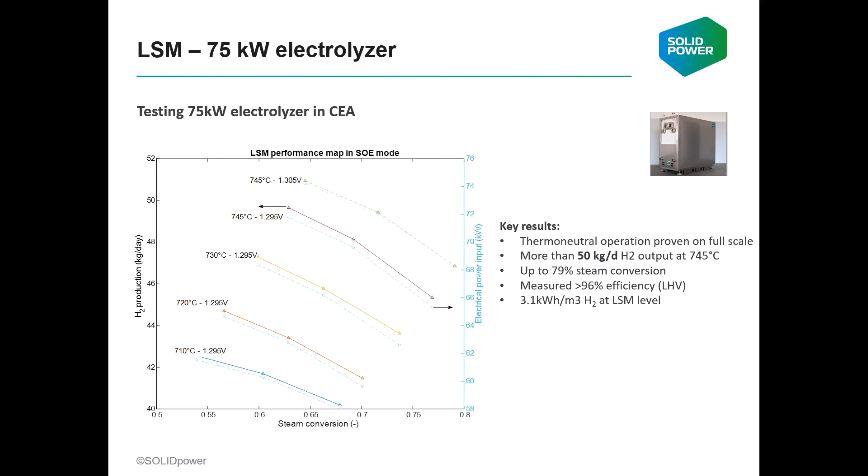Many of these research activities, especially on electrolysis, were done in the frame of European projects. So we thank the Fuel Cells and Hydrogen Joint Undertaking for the support, and we also thank the local government and the Department of Business, Energy, and Industrial Strategy.